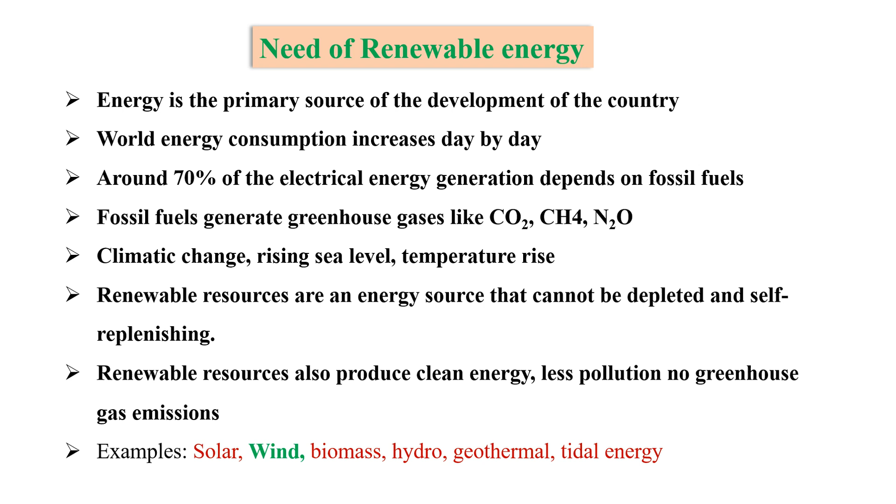In this presentation, I have chosen wind energy. Indian energy scenario: current energy status.

Around 35% of electricity generation uses coal, that is fossil fuels. Around 23% of energy generation uses natural gas, 10% uses nuclear power, and 16% of electricity generation uses hydroelectric power, 3% uses solar energy, 5% uses wind energy, 2% uses oil, 2% uses biomass, and 0.35% uses geothermal. India is the third largest energy consuming country in the world.

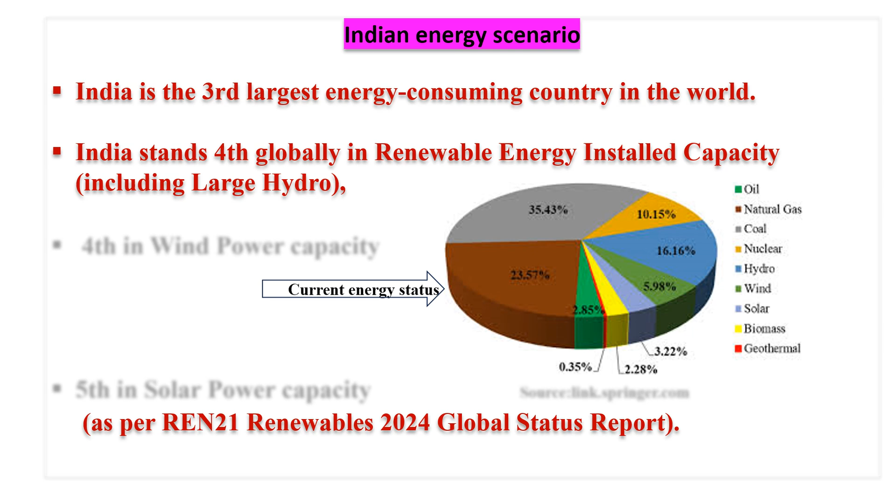India stands fourth globally in renewable energy installed capacity, fourth in wind power capacity, and fifth in solar power capacity.

Wind energy: people have been harnessing wind energy for a long time. 5,000 years ago, ancient Egyptians made boats powered by the wind. In 200 BCE, people used windmills to grind grain in the Middle East and pump water in China. Wind is formed due to the sun's unequal heating of the earth's surface.

Why wind energy? Wind is freely available, environmentally friendly, renewable, and causes no pollution. Applications of wind energy include grinding grains, ship propulsion, grain cleaning, water pumping, kite flying, and electricity generation.

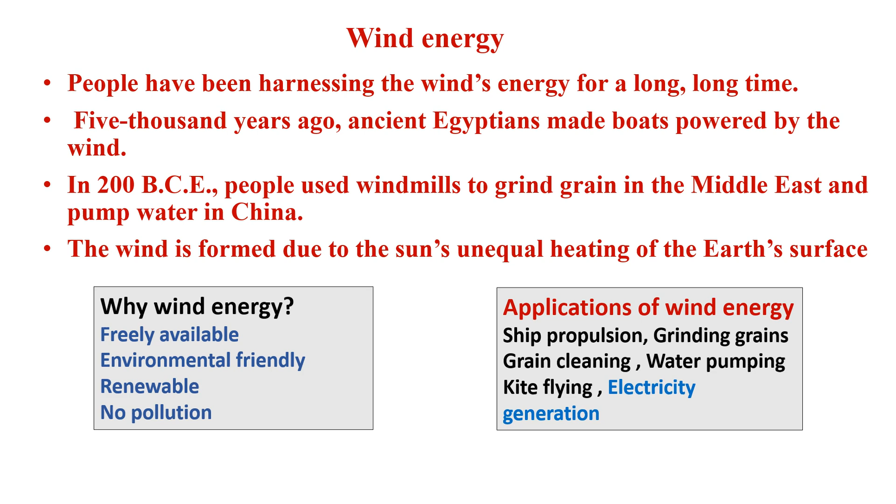What is a wind turbine? A wind turbine is a device that converts kinetic energy of wind into electricity. It does the opposite of a ventilator and fan.

The working principle of a fan is that electricity is used to create wind, but a wind turbine does the opposite—it converts kinetic energy of wind into electricity.

Working principle: it works on the aerodynamic principle. The aerodynamic operating principle of a turbine blade is similar to the wings of an airplane. There is a pressure difference between the upper surface and the lower surface of the blade, and because of this pressure difference, the blade rotates.

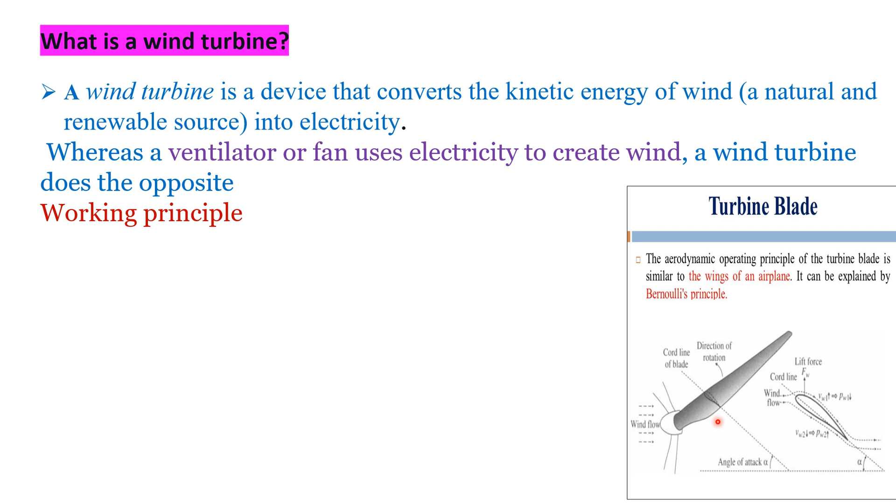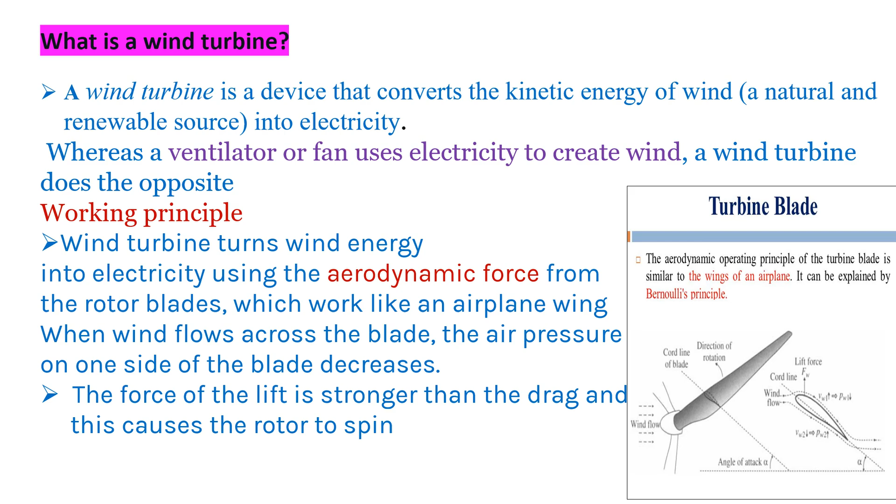Wind turbine and its components. These are the components of a wind turbine: number one is the blade, number two is the nacelle, number three is the rotor, number four is the tower, then the anemometer, generator, gearbox, and the yaw system.

Blade: the blade is similar to aircraft wings. They collect the wind and transform the kinetic energy into rotary motion, rotating at a speed between 10 rpm to 25 rpm.

Nacelle: it is the heart of the wind turbine. It contains the main shaft, gearbox, generator, anemometer, and yaw system. What is an anemometer?

An anemometer is a device which measures the wind speed and direction to control the turbines and align them towards the wind for best possible performance.

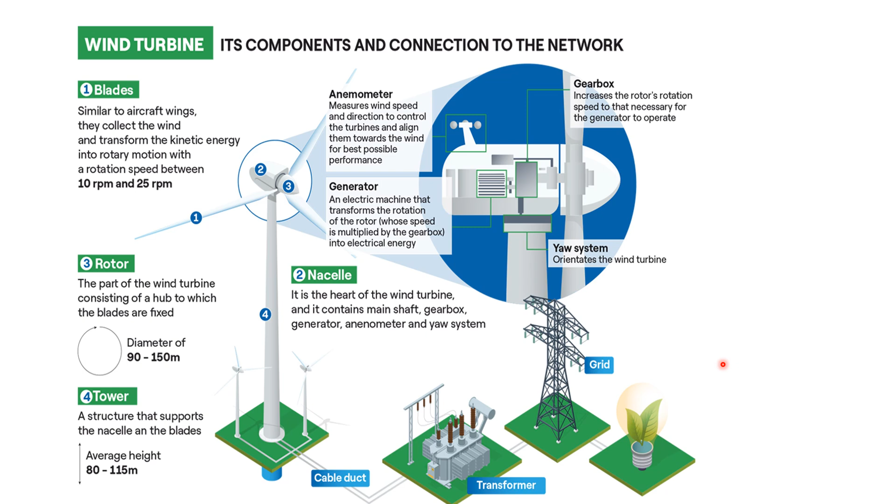The next is the cable duct, which is the wire which connects the tower with the transformer. The transformer is connected to the grid. From the grid we take the electricity, and also from the grid the electricity is distributed to various parts of the system.

Next, classification of wind turbines. Based on the axis orientation, wind turbines are classified into 2 types: horizontal and vertical axis wind turbine.

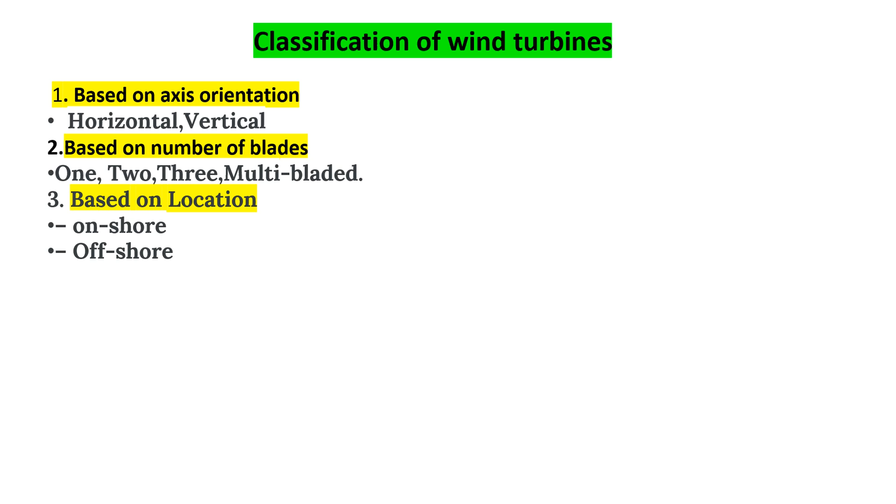Based on the number of blades, wind turbines are classified into 1 blade, 2 blade, 3 blade, and multi-bladed wind turbines. Based on location, they are classified into onshore and offshore wind turbines. Based on power control, they are classified as stall, variable pitch, and controllable aerodynamics. Based on surface, yaw control and orientation, they are classified as driven yaw, free yaw, and fixed yaw.

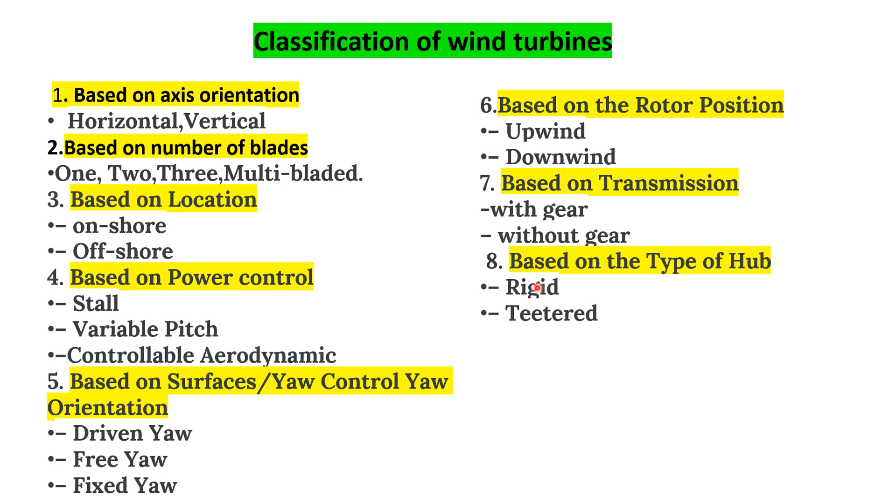Based on rotor position, wind turbines are classified into upwind and downwind wind turbines. Based on transmission, they are classified into with-gear and without-gear wind turbines. Based on the type of hub, wind turbines are classified into rigid, teetered, hinged blades, and gimbaled wind turbines.

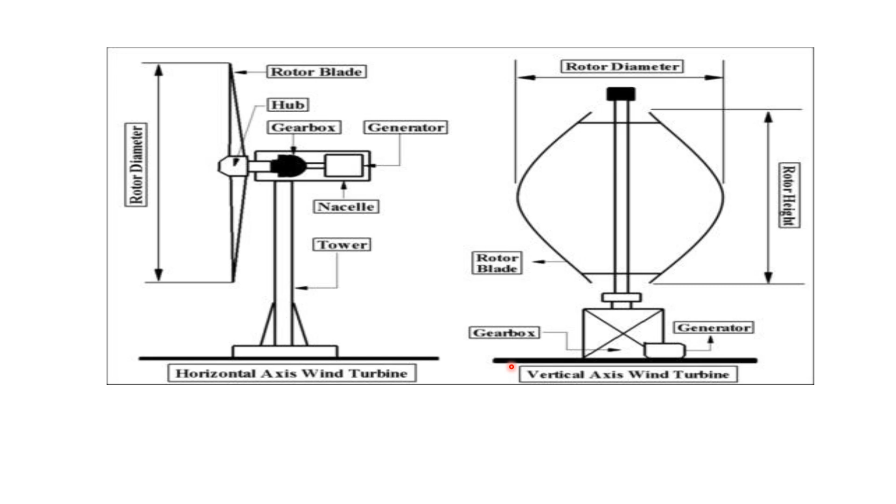This is the schematic diagram of horizontal axis wind turbine and vertical axis wind turbine. Out of several classifications, we commonly use horizontal axis wind turbine and vertical axis wind turbine.

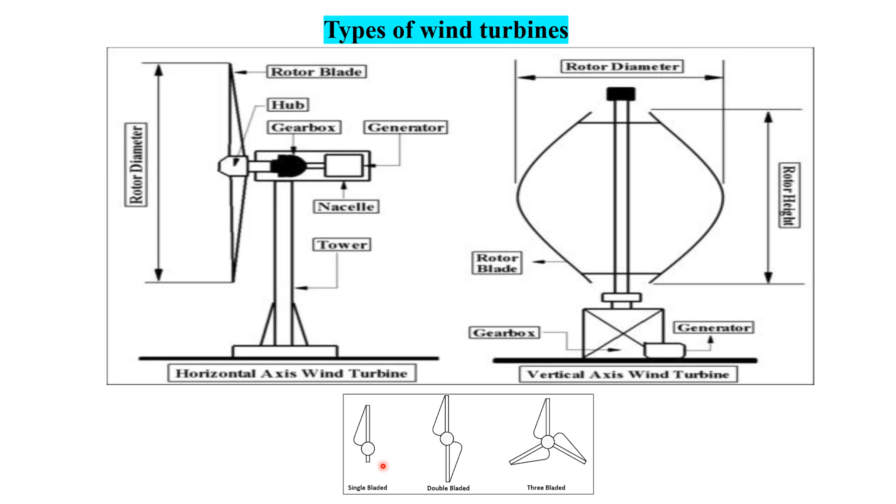In the horizontal axis wind turbine, the blade rotates horizontally. In the vertical axis wind turbine, the blade rotates along the axis of the turbine. These turbines contain single bladed, double bladed, or three bladed designs.

Difference between horizontal axis wind turbine and vertical axis wind turbine: horizontal axis turbines have a horizontal rotor shaft with blades that resemble an airplane propeller, while vertical axis turbines have a vertical rotor shaft with blades that rotate around it.

Vertical axis wind turbines are typically smaller, with capacities ranging from a few hundred watts to a few megawatts. In 2022, global horizontal axis wind turbine installations contributed to over 97.3% of the total wind power capacity. These turbines account for about 5% of the global wind power capacity in 2022.

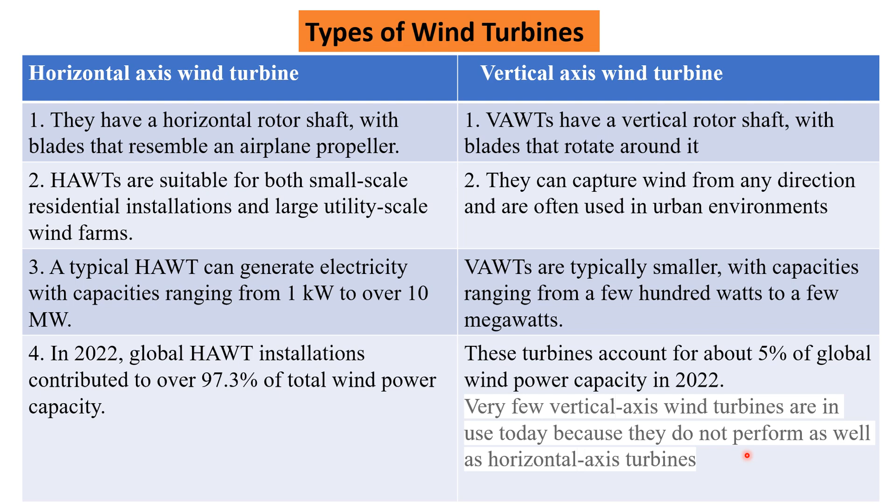Why this very low percent? Because few vertical axis wind turbines are in use today, as they do not perform as well as horizontal axis wind turbines.

Performance of wind turbine: wind speed largely determines the amount of electricity generated by the turbine. The limit range is known as cut-in speed and cut-out speed. We have to operate the wind turbine between these two ranges. This is the lower limit, which is cut-in speed, and the higher limit, which is cut-out speed. In between cut-in speed and cut-out speed, you have to operate the wind turbine. Then only it produces very high power.

What is cut-in speed? Cut-in speed is the point at which the wind turbine is able to generate power. Cutout speed is the point at which the turbine must be shut down to avoid damage to the equipment. Cut-in speed is where the generator starts to generate power, and cutout speed is where the generator shuts down to prevent damage.

In between this region, we have to operate the wind turbine to generate maximum power. Cutout speed is the point at which the turbine must be shut down to avoid damage to the equipment. Cut-in speed and cutout speed, design and size, are decided prior to the construction.

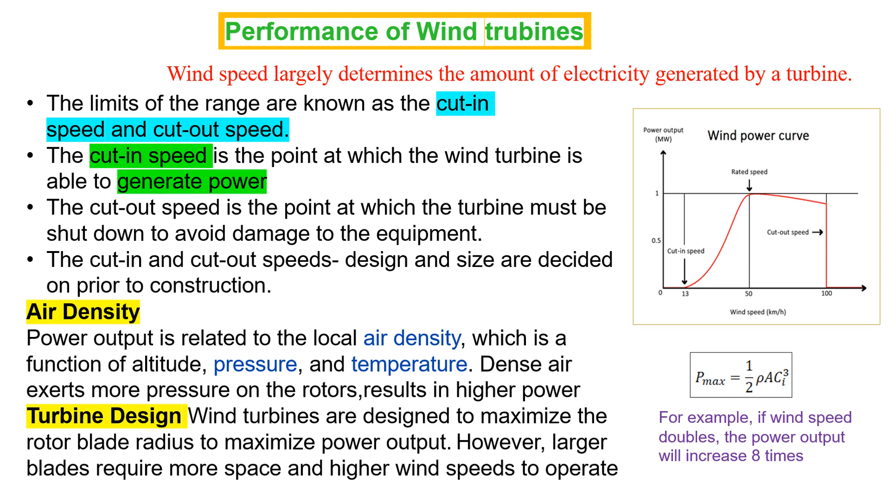Performance of wind turbines. Wind turbine performance is based on three factors: power coefficient, tip speed ratio, and solidity.

Power coefficient is power delivered by the turbine divided by maximum power available to the turbine. Maximum power available to the turbine is Pmax equal to 1 by 2 rho A Ci cube, where Ci is the incoming wind velocity, A is the area of cross section of the wind stream, and rho is the density of the air. Power delivered by the turbine with the efficiency of 59.26% is P equal to 8 by 27 rho A Ci cube.

Actual efficiency of the wind turbine may be less due to frictional losses in the rotor, gearing, and mechanical coupling loss in the generator. Actual wind turbine efficiency is in the range of 35 to 44%.

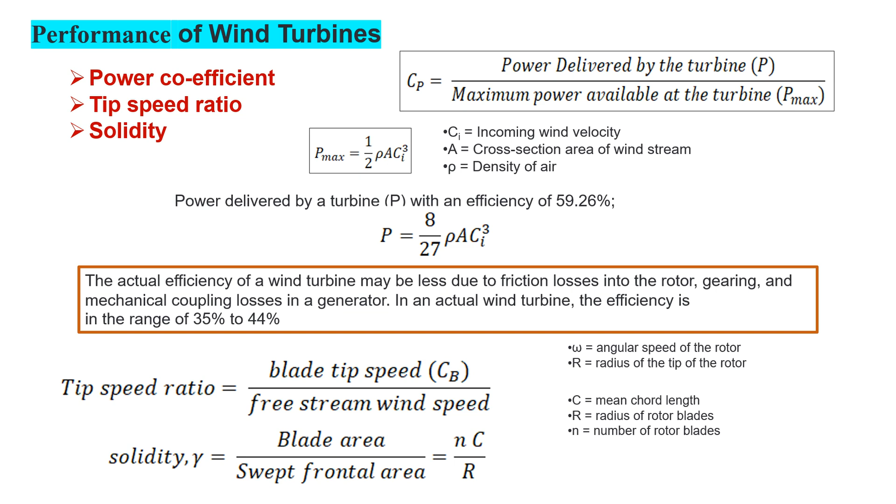Next is tip speed ratio, equal to blade tip speed by free stream wind speed. Solidity gamma equal to blade area by swept frontal area, which is equal to Nc by R, where N is the number of rotor blades, R is the radius of the blade, and C is the mean chord length.

Wind turbine capacity. Based on the previous discussion, when we change the diameter or the structure of the wind turbine, we can increase the maximum power. So year by year, the power capacity obtained from wind turbines is increasing by increasing the rotor diameter and also the hub height. This is the hub height and this is the rotor diameter. By increasing rotor diameter as well as hub height, we can increase the power capacity.

In the year 2022, we obtained 3.5 megawatt power by developing larger wind turbines. This is the structure of the wind turbine. You see this: in the year 1990, 0.2 megawatt power.

In 2000, 0.9 megawatt. In 2010, 1.8 megawatt power. In 2016, 6 megawatt power. In 2035, 17 megawatt power. You see, the size of the wind turbines is increasing day by day. While we increase the size of the wind turbine, we can develop higher power, but there will be some limitations.

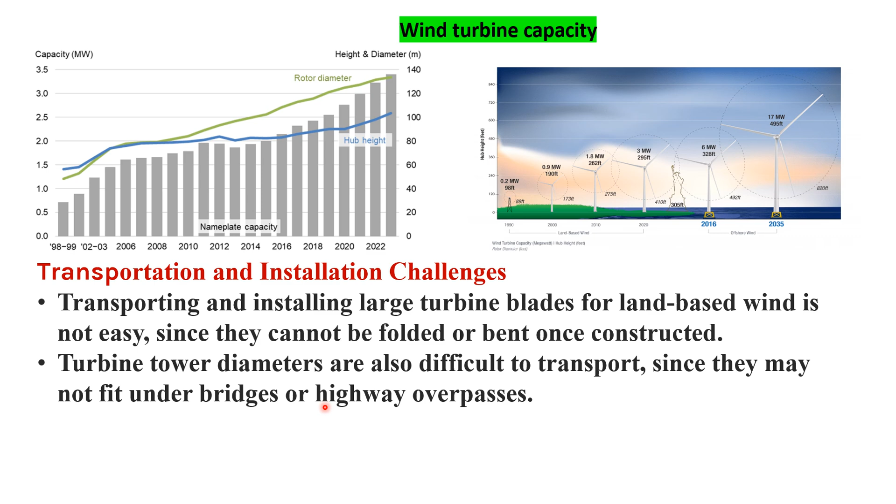What is that limitation? That is transportation and installation challenges. If the size is too large, we are not able to take those parts for longer distances, and installation is not easy. So transportation and installation of large turbine blades for land-based wind is not easy since they cannot be folded or bent once constructed. Turbine tower diameters are difficult to transport since they may not fit under bridges or highway overpasses.

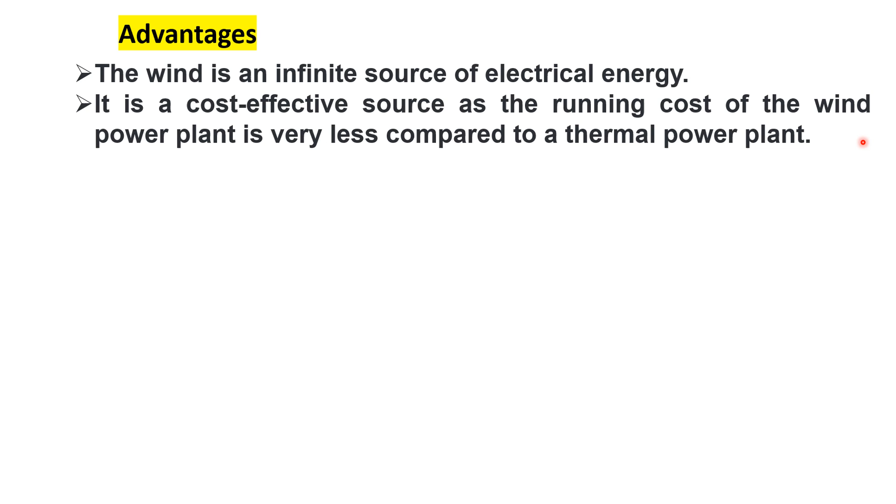Advantages. Wind is an infinite source of electrical energy. Wind is a freely available source, so we can generate electricity free of cost. It is a cost effective source, as the running cost of the wind power plant is very less compared to a thermal power plant. It is environmentally friendly. Wind power plants do not require any carbon fuels or carbon emissions, so this plant helps to reduce carbon emission.

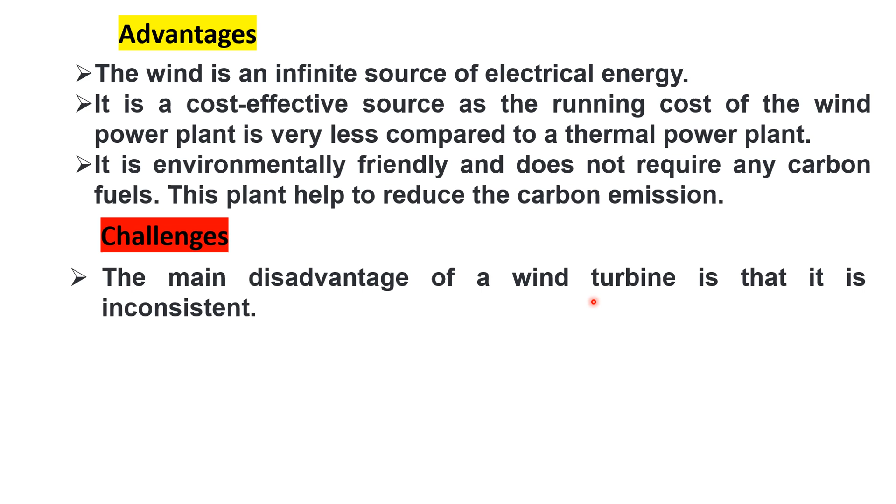Challenges. The main disadvantage of wind turbines is inconsistency, because the wind is not consistent. One day we get a larger amount of wind, another day we get less amount of wind. So the generation of electricity is not consistent. It differs because availability is not uniform throughout the day.

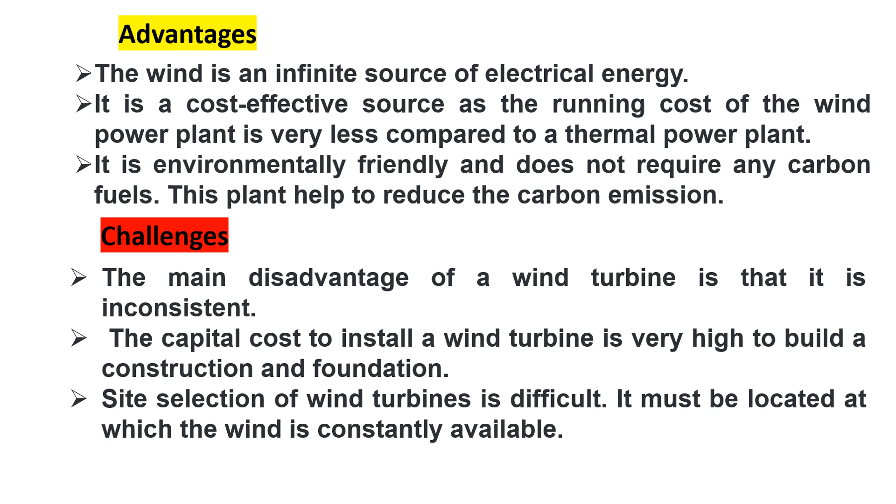Capital cost to install a wind turbine is very high for construction and foundation. Site selection of a wind turbine is difficult; it must be located where wind is constantly available.

Conclusion. Converting to renewable energy will not only better sustain the world's rapidly growing population, but it will also provide a cleaner, healthier environment for the generations to come.

So this is the energy change. We are changing to renewable sources, increasing year on year. This is a very good trend. Thank you.